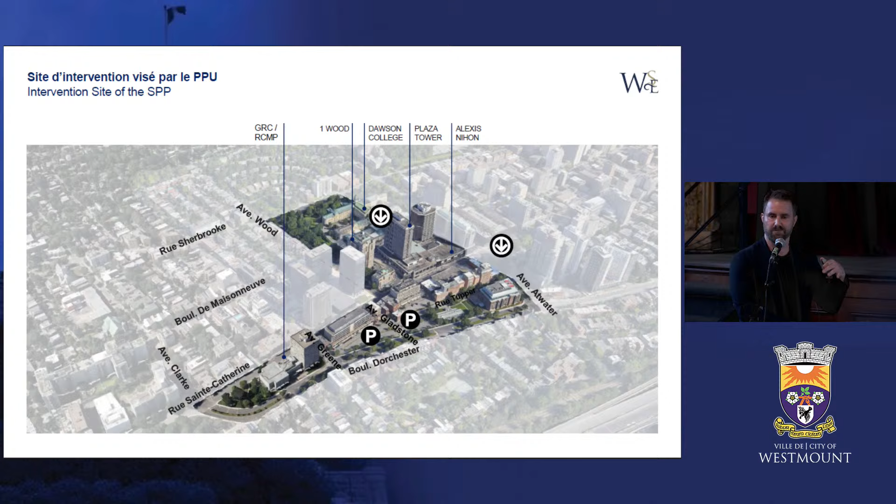As I said previously, there's a metro station that is located at the fringe of this area. This makes Southeast part of a TOD, a hyper-centered TOD. Because of that, and because we are part of the CMM, we must comply with the requirement, the density thresholds that are required for the members of the CMM.

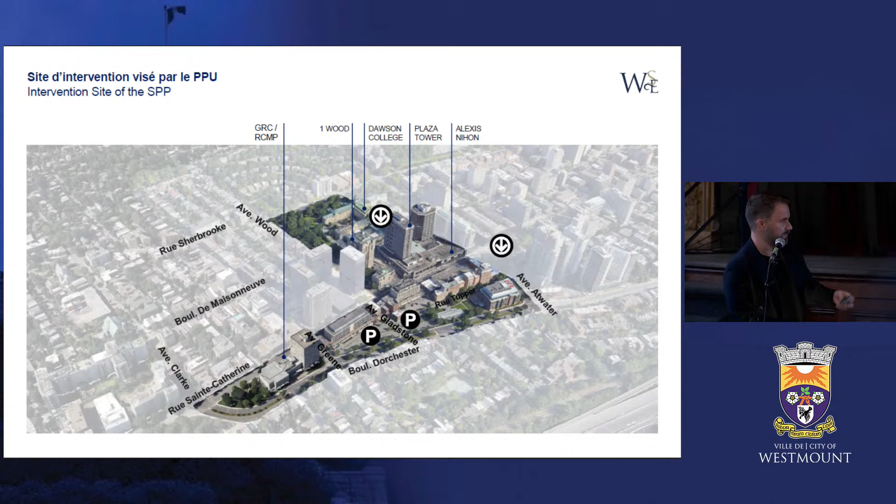Now let's go have a walk in Southeast. This is a place that you certainly all know. We can say this is a disparate area. There's a mix of heritage buildings, office buildings like RCMP and the 1100 Atwater, empty lots, and the city is owner of those empty lots, and decaying properties as well. So this is truly disparate.

Yeah, so the picture says it all. This is a place that we don't have to explain a lot. This is how it is now, and we do not talk about the social situation also that is very sensitive in the area.

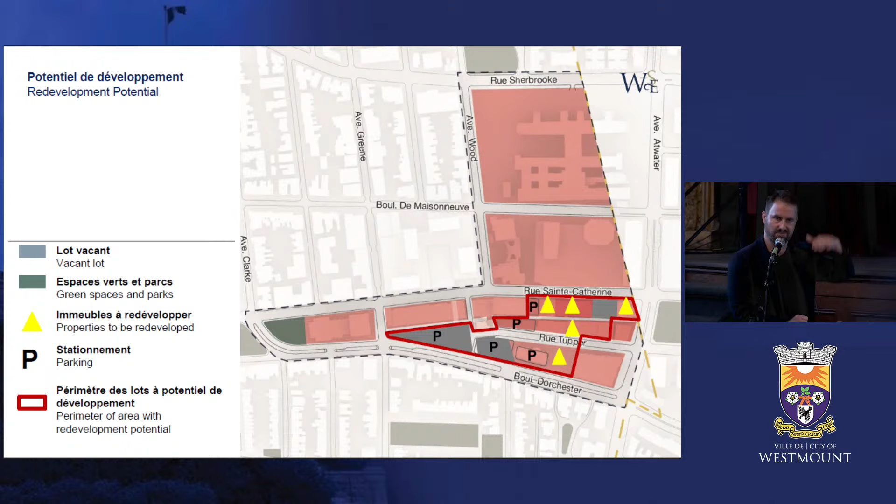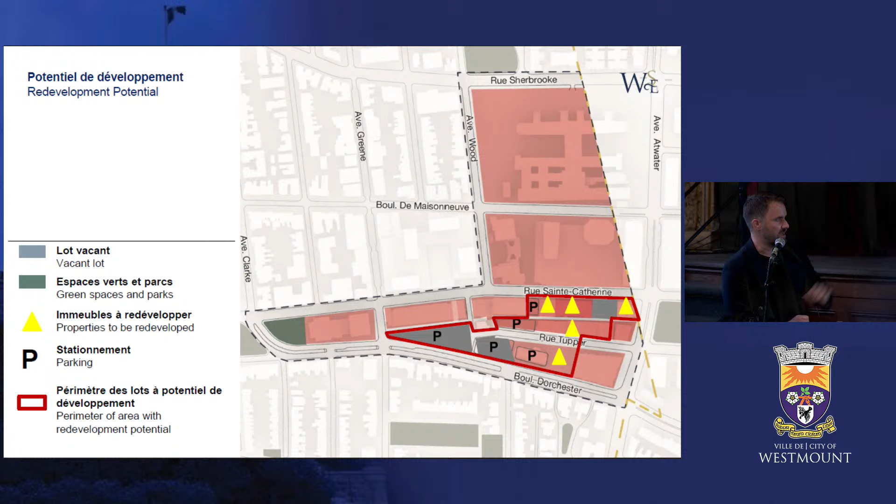And finally, the garage structure of the office building that is on Atwater. So not the office building itself, but there's a garage structure that is half underground, half above ground, that is considered as to be redeveloped. So the calculation is for all the area that is comprised in the red line. This is where we must reach the 480 units by hectare. This is the true situation.

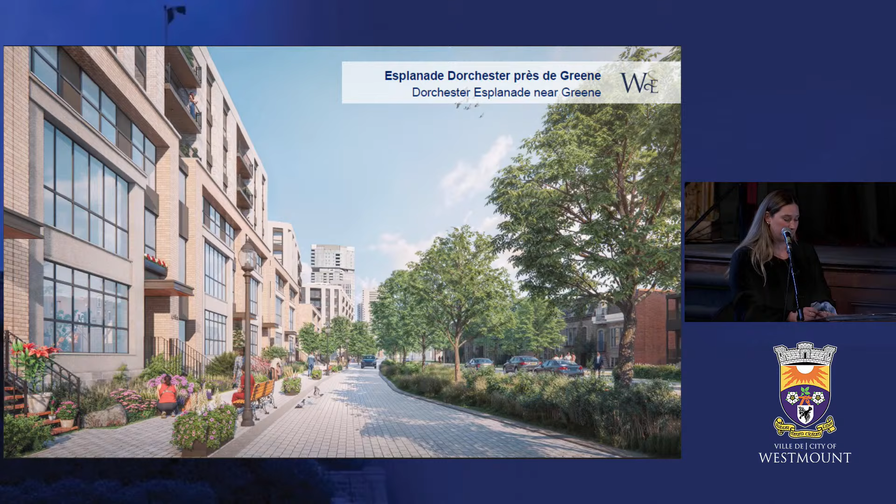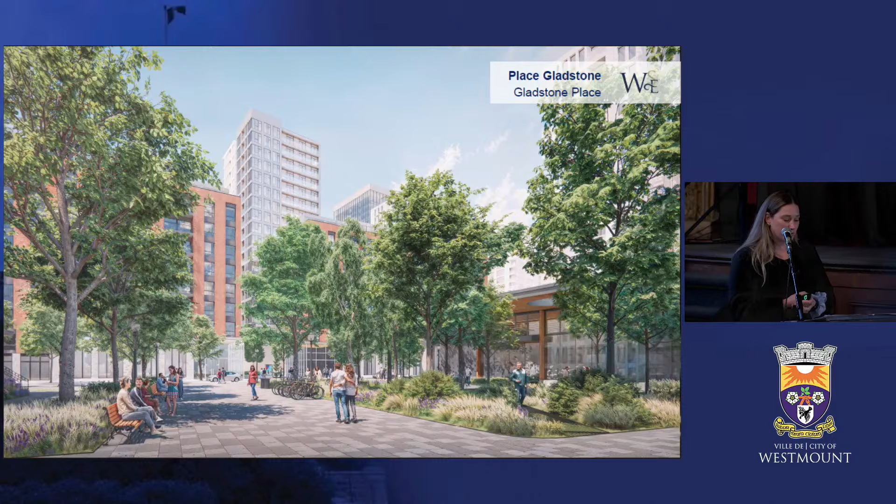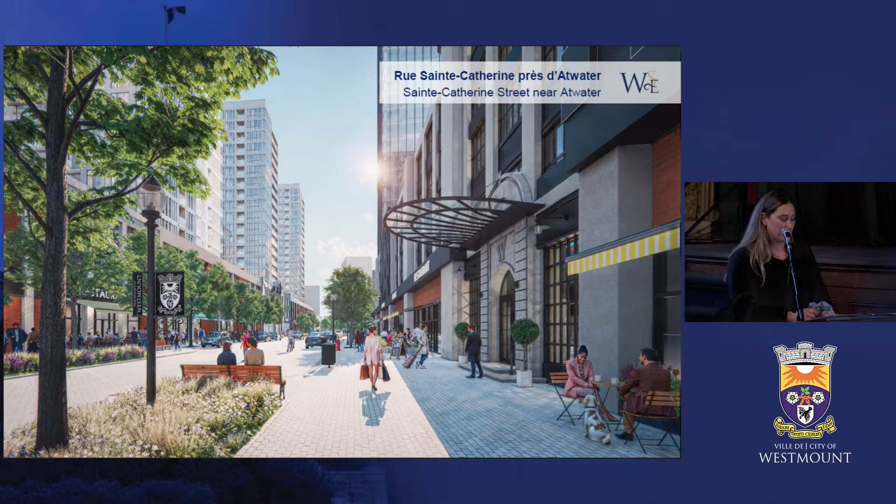So now, how do we make this vision a reality? We need a strategy, and first, about parks and places. Here are the three major aspects of the project: the Esplanade, Place Gladstone, and Parc Dorchester. There's also the idea to add planting beds wherever possible, as water retention structures, and green roofs.

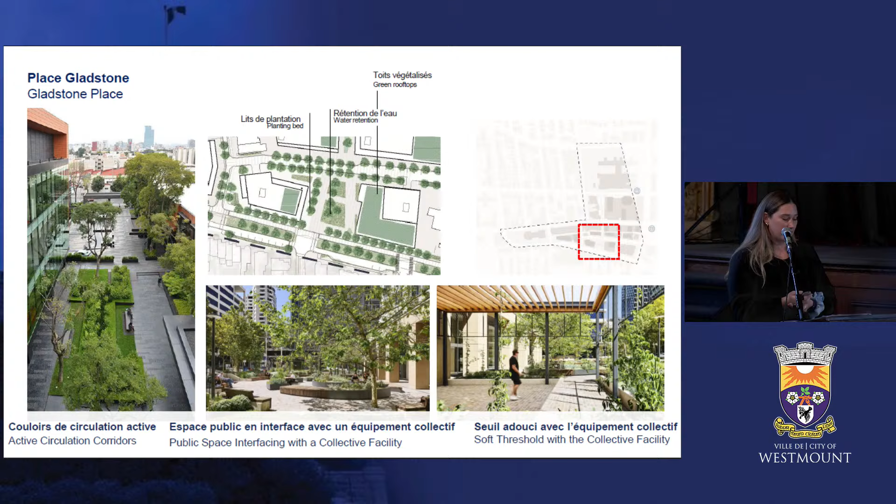In detail, for Place Gladstone, it's a pocket square with an active circulation corridor. We have an interface with the potential community facility, and the indoor-outdoor relation is the kind of idea we want here. It's a large planting island with extensive canopy. For Parc Dorchester-Clark, with the images shown, the idea is a whole new configuration, a larger green space, with smoother active travel.

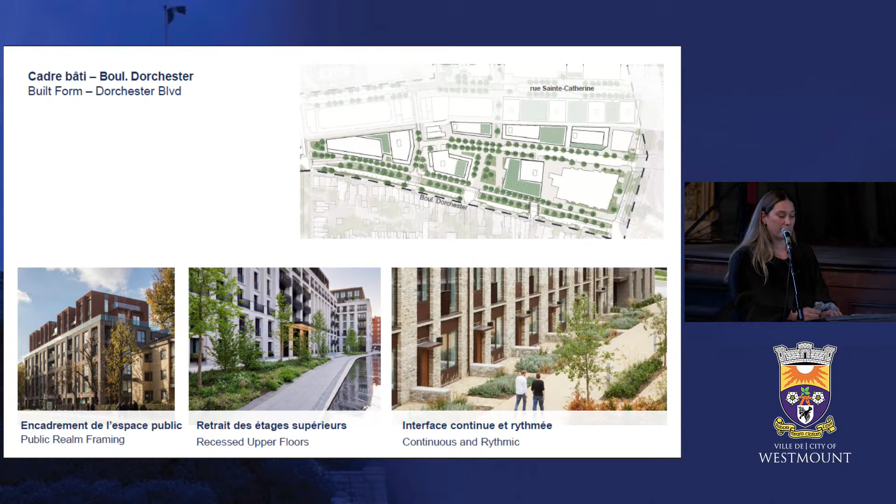Again, here for Dorchester, with the images, we can imagine interesting modulation with draw, frame, and rhythm. And for St. Catherine, we have a desire for distinctive architecture, a well-thought podium to fit in with the Westmount context, and narrow development to keep the sun shining in.

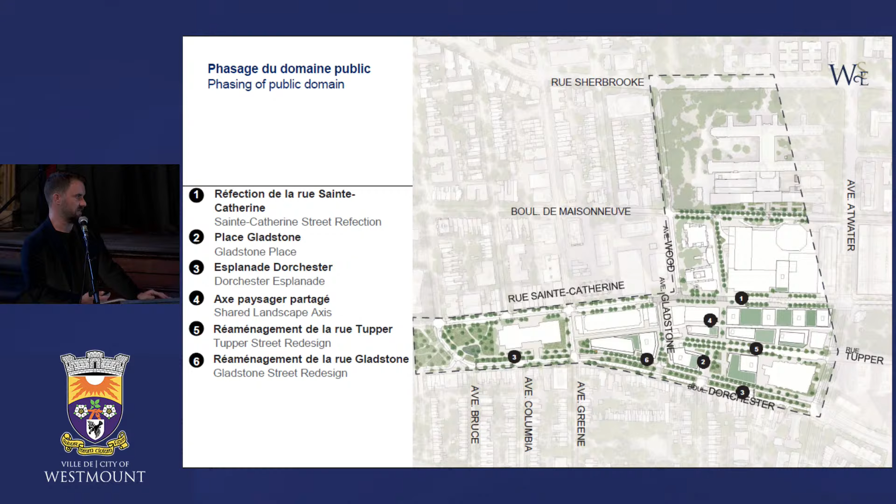Then, thirdly, the Esplanade Dorchester that runs along Dorchester, shared landscape axis, that is the continuity of the Place Gladstone, Tupper redesign, and Gladstone Street redesign at the end.

This is my last part. Thank you for your patience.

We presented you the report document, the planning tool, the PPU. Goes with it the adoption of concordance bylaw, règlement de concordance. Those are the provisions that are opposable to residents. So the PPU document is a vision document, but it's not a typical bylaw. The real bylaws that we use for construction permits is in this.

So we will have to modify the zoning bylaw to adapt for the high density building footprint, etc., to represent what is in the PPU. We have to add - and this is an interesting thing - the addition of a park contribution for redevelopment projects.

The municipalities in Quebec can and normally require a contribution for parks when there's subdivision, lot subdivision. It equals either 10% of the superficie that is given to the city for park purposes, or the equivalent of this 10% of the land value.